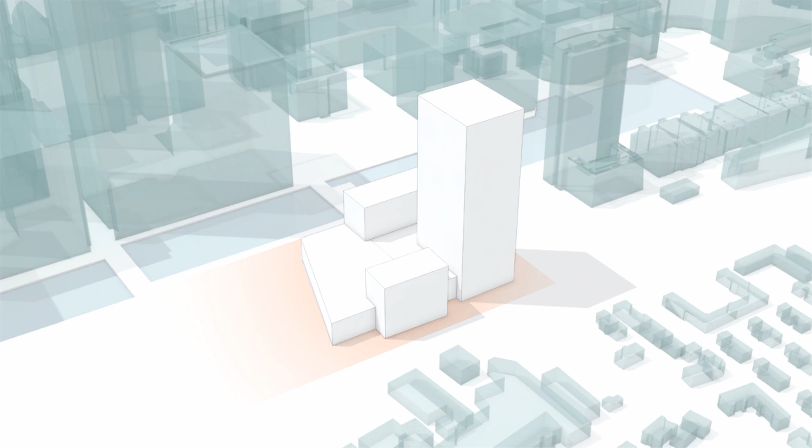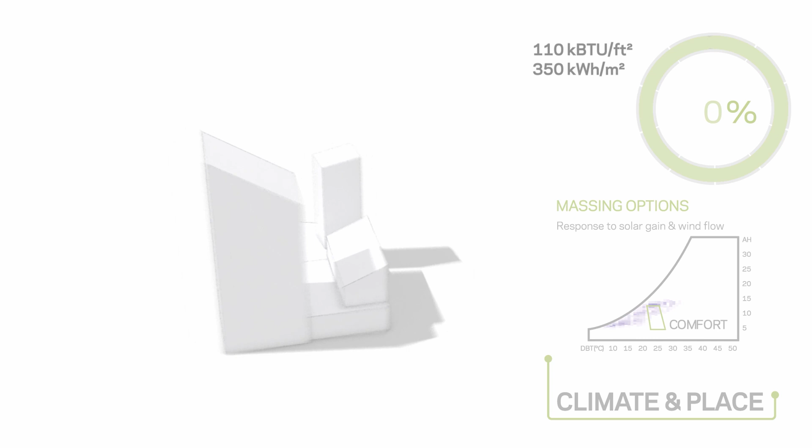At HOK, we utilize an evidence-based design process that begins across all of our projects. It's really focused in on trying to understand, with the context of our clients' goals around net zero energy, water, and waste, how do we explore the climate? How do we look at the diverse circumstances by which we can organize ourselves around biome, weather patterns, and other cultural conditions of a space?

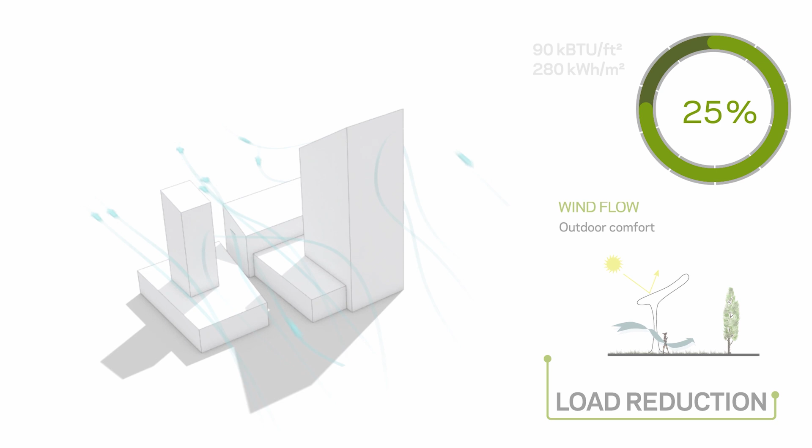How do we ensure solar access at the ground level and enable a passive solar design across a building envelope? How do we begin to look at natural ventilation and use parametric models and computational tools to optimize our building envelopes to integrate those natural systems into the built environment? By doing that, we reduce the overall loads of the building.

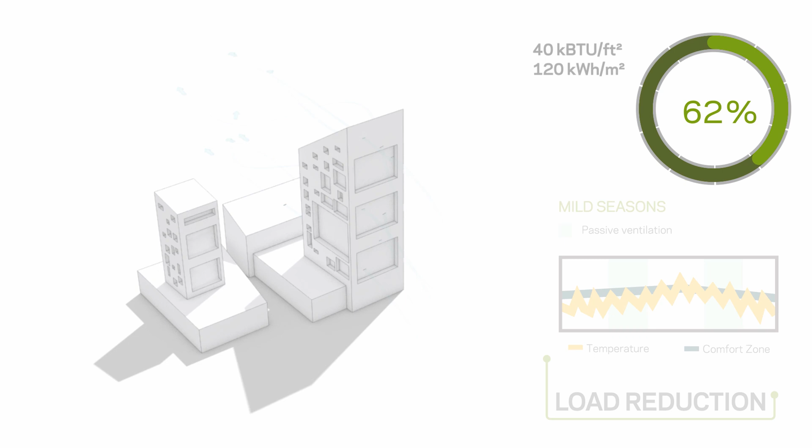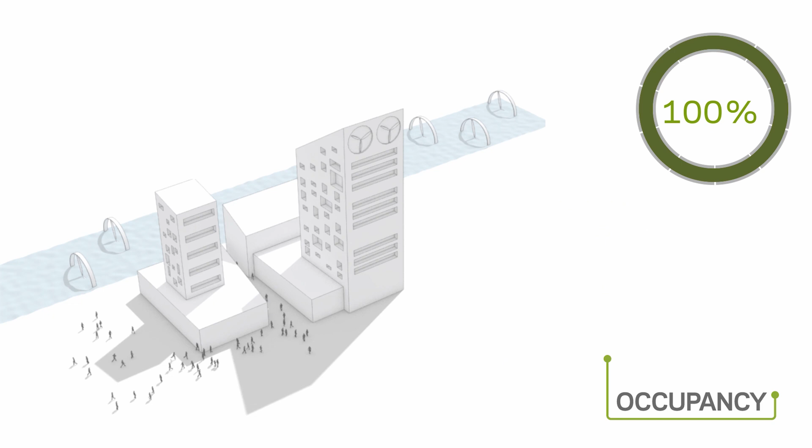A more important feature that we need to talk about now more than ever: what's the health and well-being of people, as well as the environment within that context? The last visual rises very quickly here, as we begin to see a building all of a sudden bloom with life on it. And it's not an easy piece of this puzzle. What does it mean to bring ecology back to the urban environment? That's what we're going to talk about over the course of the next hour.

We've been studying this at HOK for about a decade, trying to understand how we could leverage existing federal office buildings owned by the General Services Administration, partnering with Metropolis Magazine to explore how we can not only achieve net zero energy, but funnel water, utilize carbon emissions within the built environment and outside of it, and sequester it within building forms. This process is really meant to feature what we call net positive impact.

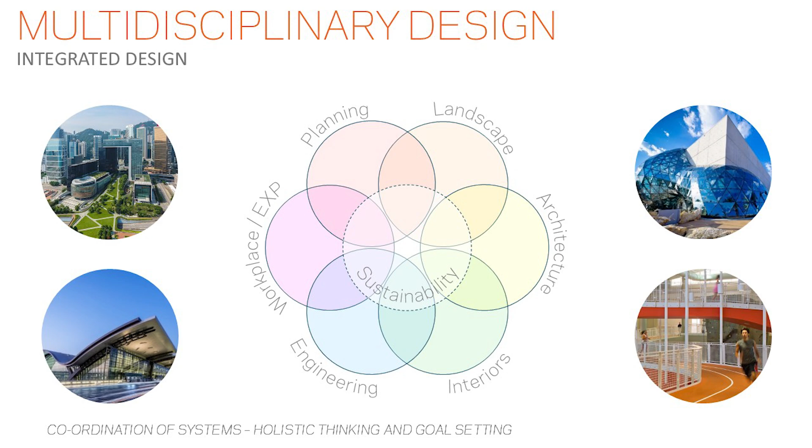Whether we're designing Tamar Park in Hong Kong, a wonderful open green space that allows the community to collect, or sports arenas, we leverage our individual expertise. As any problem that might emerge in design or even in the automotive industry or others, we have to ask questions of other experts to reach a better answer.

And it's that coordination point that we begin to term as multidisciplinary or integrated design. We look at the Atlanta Falcons Stadium and the Oculus that opens up, bringing daylight down to help grow the grass and also provide a dramatic daylight experience. We need to seek expertise beyond that which we hold ourselves.

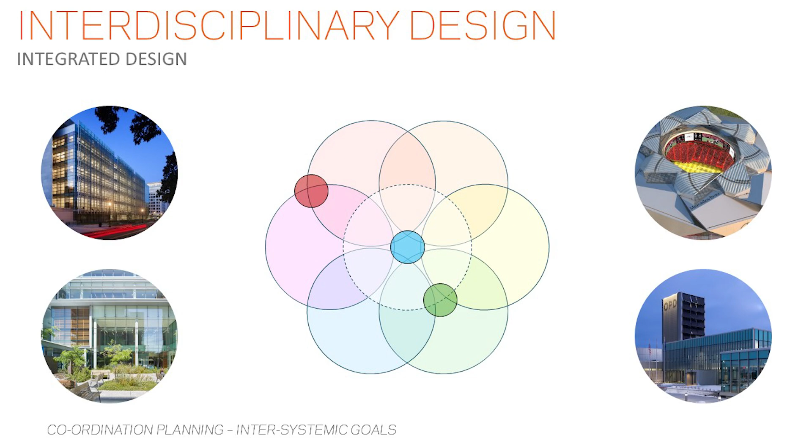At times, we develop relationships with those partners, and we start forming our own cultural community within design. It's at that point when we reorient ourselves to the expertise that exists around us that we begin to completely take on a bit more of a communal understanding and focused growth. We call this interdisciplinary design.

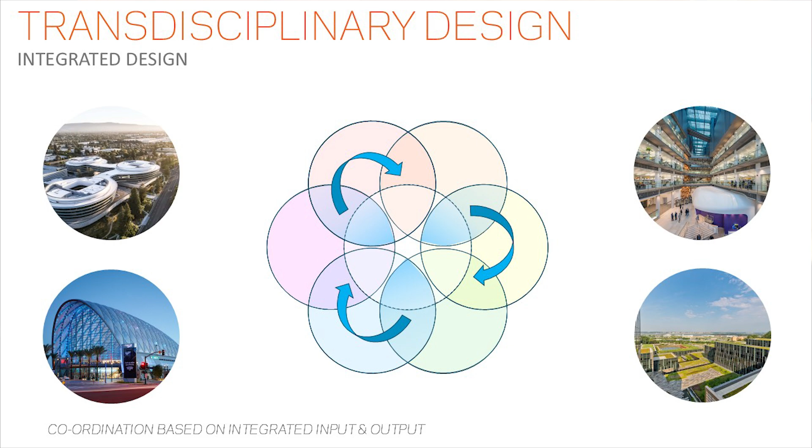The results from this, exhibited at Apple's Central & Wolfe campus or ARTIC in Anaheim, a future high-speed rail station, begin to demonstrate solutions that if you took apart any piece of it, you would lose a part of the whole. What would that curvilinear office complex meant to evoke the landscape look like if you took away those curves? If you took away the lamella form of that railway station that reduces the embodied carbon of its structure by up to 80%, you're left with another square box building. And so we need to leverage our partnerships to better understand how we solve problems.

There's another expert that we should be looking at more frequently, and that's nature itself. How do we rely on 3.8 billion years of evolution and nature's genius to serve as a mentor for the work that we do? And then when we do that, we begin to create mutualistic prioritization of the core, the environmental systems, with the whole.

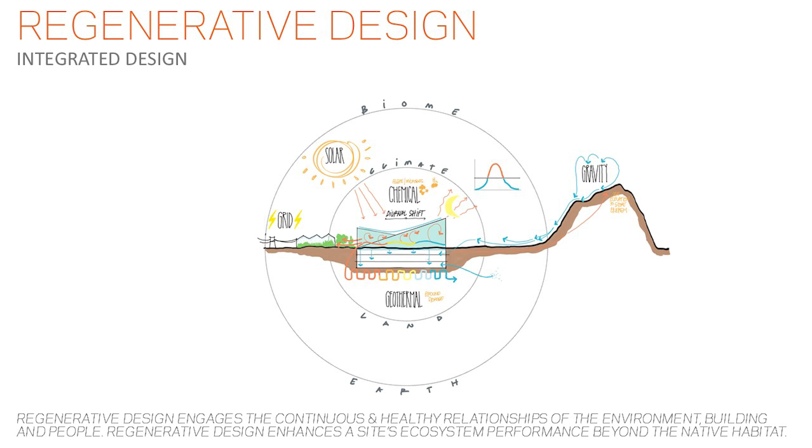We can all gather ourselves around a very common goal of environmental stewardship. Regenerative design engages the continuous and healthy relationships of the environment, building, and people. It enhances a site's ecosystem performance beyond that of the native habitat. Put very simply, regenerative design brings new life to something that has been depleted. It takes every decision and action and focuses it squarely on what would be best for nature. It puts life at the center.

Over the course of the next 45 minutes or so, we're going to talk around three recurring topics. I want to get you all engaged around a common challenge that we face within urban spheres: issues of resilience. We're going to talk a little bit about biological systems and how they may serve to be a good guide to it. And we're going to talk about design processes—how do we solve those challenges as a company, as a community, or as other more informal organizing entities?

The first challenge I'll present is that we face today, more often than any other point in human history, more than 1 million people moving into cities every week. That's the equivalent of building Hong Kong seven times over every single year. And so imagine the resource depletion we face against natural systems as we grow this urban entity.

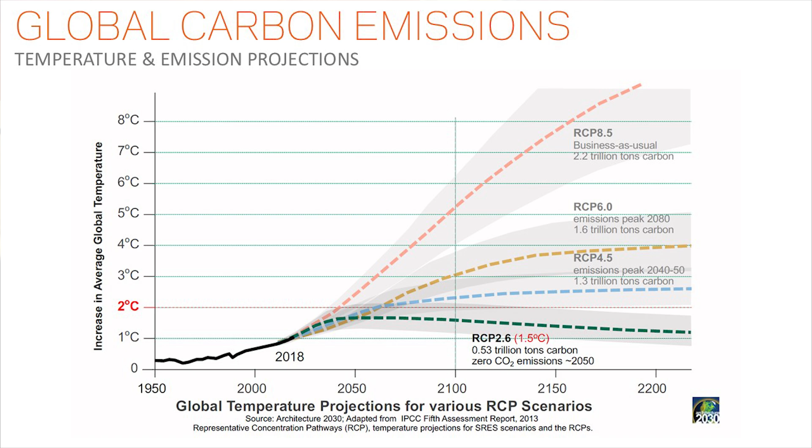Many of you involved here in the climate and sustainability track have no doubt seen some version of this graph—look at the IPCC reportings on our general trends towards CO2 emissions. If we follow a business-as-usual track, we reach 2 degrees Celsius and beyond, and impact a point of unsustainable climate change. If we can amend our behaviors, if we can build in smarter, better ways, we can bring down that curve.

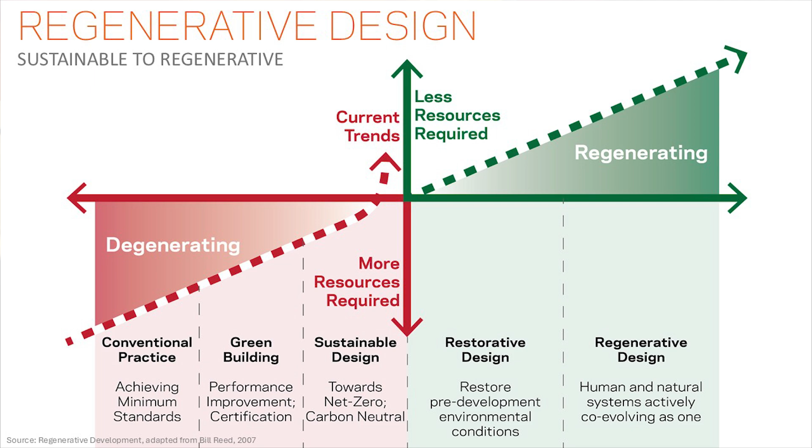A lot's happened over the course of the past several years, and we can be very excited about drawing that down. But what we want to do is go beyond a current target and focus goal of decarbonization or carbon neutrality, a goal of zero, to something that is hopefully more aspirational. And so sustainability becomes a somewhat inadequate term for the work that we're trying to accomplish.

If you all that have traveled here to Austin were to go home or go back to your business, and your supervisor asked you, 'What did you learn this week?' and you said 'nothing,' you'd get in trouble. If you went to your quarterly board meeting and asked, 'What were our profits for this year?' and you said 'zero,' you'd probably be fired. We need to move beyond achieving zero benefits for the environment.

Regenerative design looks to move ourselves from a standpoint of purely performing sustainable activities, a point of view of conservation, which we still want to maintain, but to go beyond that, to engage natural systems to replace artificial ones that we might not need, or that ecosystem services might perform better. At the point in which we begin to have those human and natural systems actively co-evolving as one, that's where we find parity between the artificial environment and the natural environment, and we're designing for nature and communities to join into each other equally.

This is an important challenge we have to face because biodiversity is beginning to become depleted around the world, and in order for us to achieve these goals, that becomes a really critical piece. The pharmaceuticals we rely on for our own health, the more systemic storms and climate change events we see, are all being exacerbated because nature isn't able to balance itself. And so biomimicry becomes another interesting piece of this.

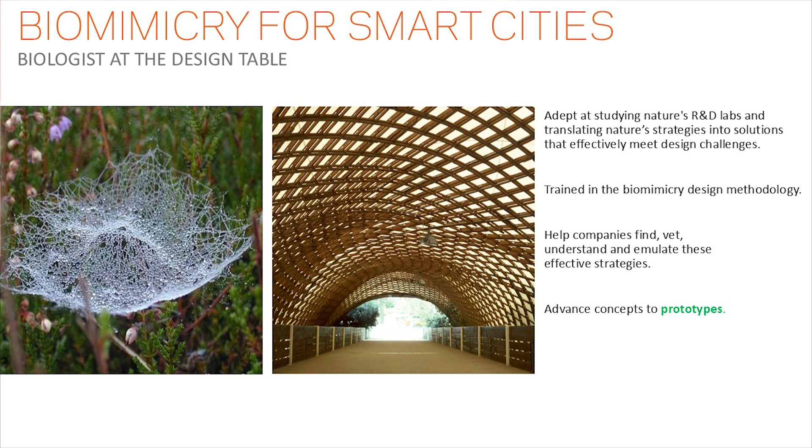Moving into number two, we're going to focus on how biology and natural systems can become this inspiration for us. The goal in biomimicry isn't to simply copy the forms we find in nature, it's to innovate using nature's principles. That means designing with the systems found in nature, those that have evolved out of 3.8 billion years of evolution on Earth. So that means studying nature's own R&D labs, understanding the ecological processes that exist, and how those can be utilized in both industrial applications, in building, but also very directly in the natural environments that we continue to inhabit and that provide us safe haven.

We want to find more companies and partners to vet, understand, and emulate those effective strategies, and formulate those as prototypes that we can begin to advance forward.

We're moving beyond a position of intent to one of evidence-based design in this process. We have for a long time been trying to create additional open space, nature within our cities. We know intuitively that these provide us benefits. But we're now able to, through the assistance of ecologists who have worked for 25 years at Ecometric Solutions Group, as well as artificial intelligence, begin to track the health and life of those natural systems to quantify how nature may evolve. So the third piece I mentioned is going to be about design and talking about solutions.

Our first solution really is a design process—no individual organization can solve all of these problems on their own. Our main partner in this is Biomimicry 3.8, a group that specializes in this biological strategy. HOK is partnered with B3.8 as well as Jacobs to begin to leverage all of the genius skill sets that we have to start working towards common challenges that we find in a group of change agents.

Those include companies like Ford, Google, Microsoft, amongst others, that are making commitments not only to environmental stewardship, but to environmental restoration. In this learning process, we work with them to create adaptive laboratories within the environment that allow nature to thrive. And so our positive performance methodology is a fairly simple one.

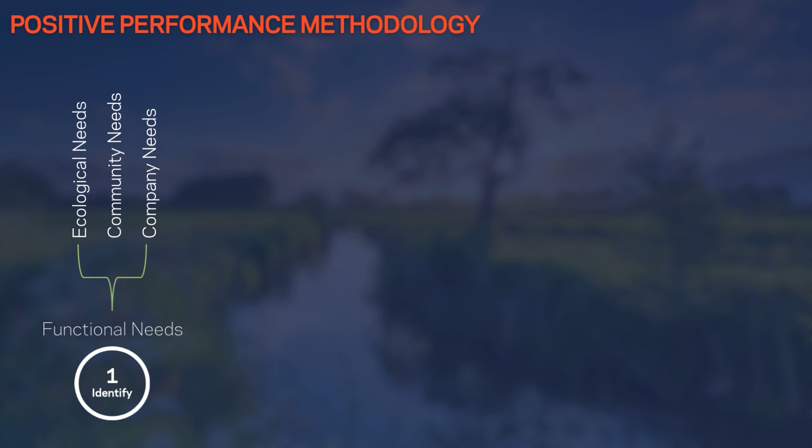So to express that in a little more detail, that positive performance methodology begins really by identifying the functional needs that exist between the ecosystem, a client, and a community that need to be served. We look at that ecological performance gap by quantifying it—what does the local site do against that reference healthy habitat?

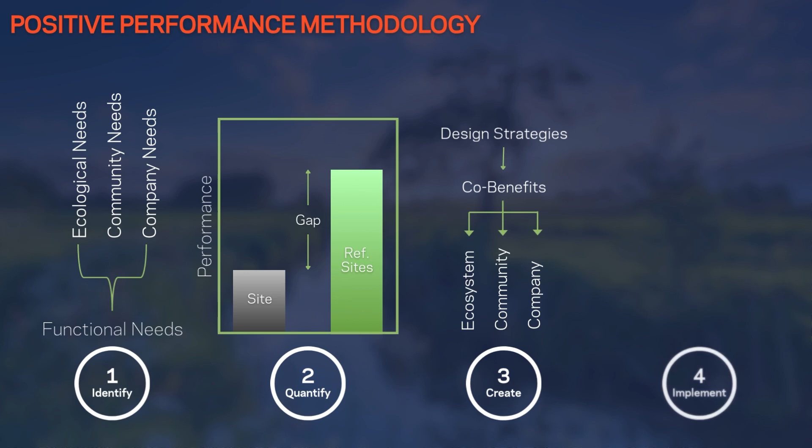We create design strategies to close the gap, identify those co-benefits that meet the mutualistic needs of the ecosystem, community, and company. And we work with management to understand how we can operate that long term.

We'll begin now to take you on a bit of a world tour of a number of different resiliency challenges that are commonly experienced, taking you through North America, Asia, Africa, the Middle East, and back to North America to explore the challenges we face and how we've relied on biology to solve them, and how we're beginning to identify and track what's being performed with them.

So we'll start off with hurricanes and flooding. Around 250,000 people have died over the past 25 years due to flooding, and more than 2.5 billion people have been impacted. Annually, on average, we see about $500 billion of investment impacted by floods.

Beginning in Washington, D.C. at the U.S. Coast Guard headquarters, a 1.2 million square foot office building completed around 2015, we were charged with exploring how to manage stormwater impacts across a 450-acre site, most of which is upstream or uphill from us and totally impervious. How can we manage not only the rainwater that fell on our site, but also what was rolling down towards us?

When we begin to look at biology, we can find keystone species that solve these challenges, and the beaver is a phenomenal one for this. Beavers slow down, filter, store, and distribute water. By looking at the collection of dams they distribute, you begin to understand a purification process that can happen. We can do this by looking at soils and the terracing of buildings.

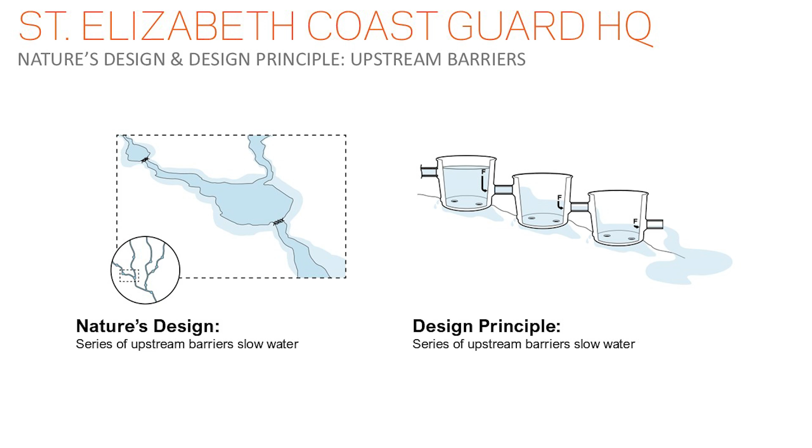So how can we translate nature's design and genius, this very simple series of upstream barriers to slow water, into a design principle that echoes that similarly? It's not as simple as creating a bunch of cascading roofs; you'd have a lot of water runoff.

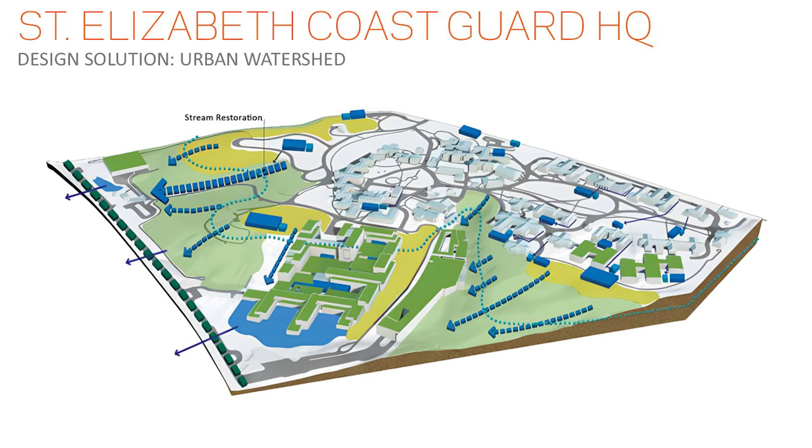Our watershed is pretty significant. We wanted to design a campus that would function as well as the forest to the north and south of us. Our main campus, the 1.2 million square foot U.S. Coast Guard headquarters building, receives water from upstream as well as from above. Creating that terracing landscape allowed us to look at the total quantity of water we would need to manage on site.

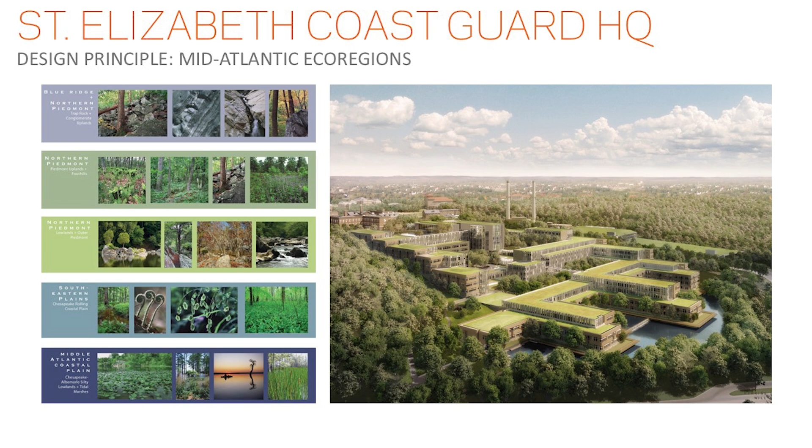We began to look not only at the context of the beaver, but the context in which we lived, across 5 different ecoregions, from the Piedmont Mountains to the Rocky Piedmont Plains, out to the southeastern coast and the mid-Atlantic coastside. By exploring these different landscape species, we began to understand different soil contexts and species we could propagate across the site, and developed a vision for the project.

How could we utilize it to service as this stair-stepping process? The resultant nearly 500,000 square foot green roof is one of the largest in North America. It manages approximately 500,000 gallons of water each year.

More unique than the beauty we see here is how the ecology around the site has responded. One of the unique maintenance challenges is that we have deer migrating across our site. A bald eagle's nest has formed on the administrative building as you enter the site, and the camera features that commonly. We've replanted trees, and the ambient temperature of the zone is much lower than the rest of Washington, D.C.

Each of the 5 different ecozones we looked at as inspiration for soils became different courtyards cascading down through this. What that creates for our frontline workers is a really calming environment for people with very stressful jobs. They get to look down on these terraces, looking out towards the Anacostia River, and experience that beauty.

Within the interior environment, you can begin to see, even from the child care center, the connections that every different office environment has back out to nature, inviting you into these different courtyards with distinct representative characteristics.

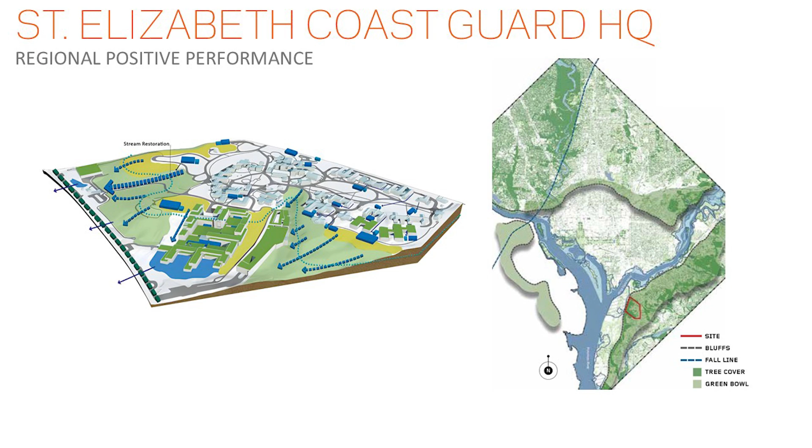Well, this is one campus. Imagine if we began to manage all of the stormwater that collected on our site and worked to actually funnel that and better the communities around us.

From the mid-Atlantic US, where we have water abundance, to Dubai and the UAE, where we deal with water scarcity, I'll take you now to Al Barari, a residential hospitality development about 10 minutes outside the center of Dubai. It's here that Al-Barari, best known for its landscape company Greenworks, has created one of the first sustainable hospitality developments in the region.

What we deal with in Dubai is what you might expect: temperatures above and beyond 40 degrees Celsius every day of the year, high rises and impervious hardscapes, making the ambient temperature feel like 50 or 60 degrees Celsius.

On the site here at Al-Barari, we took inspiration from Al Ain Oasis, a regional oasis that teaches us lessons about how to store water underground and properly recycle and reuse it. Being the site of a landscape company, it was already an oasis, but as it's being converted into a residential development, we're seeing a lot more water use. So the question became: how can we redistribute that water and create a more habitable condition, re-exploring urban living in Dubai?

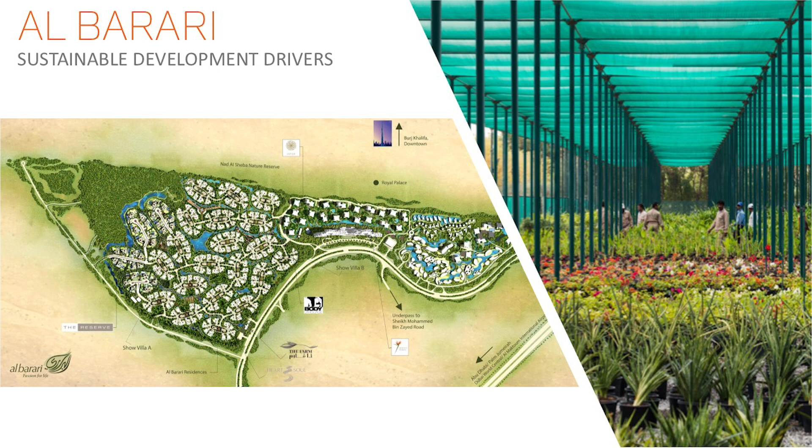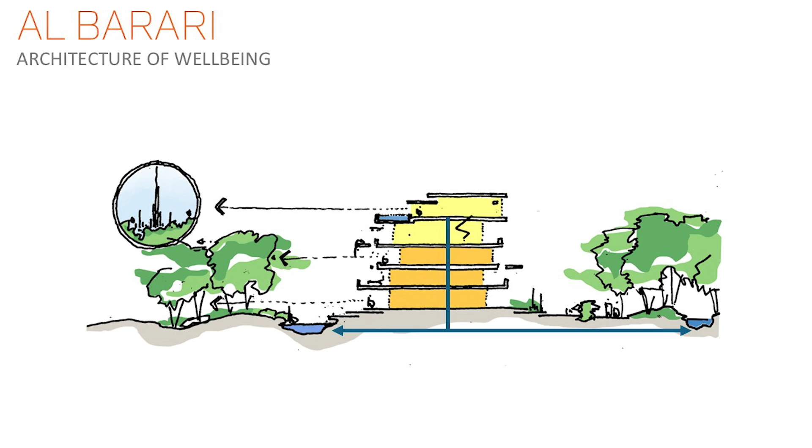The Greenworks company had, for the longest time, followed fairly sustainable practices for its landscape nurseries. But as we began to look at converting that into mid-rise residential living, we wanted to take all of the water being used by the buildings and feed it back into the ground, allowing it to propagate through verdant landscape waterways to really bring the landscape to life in the area.

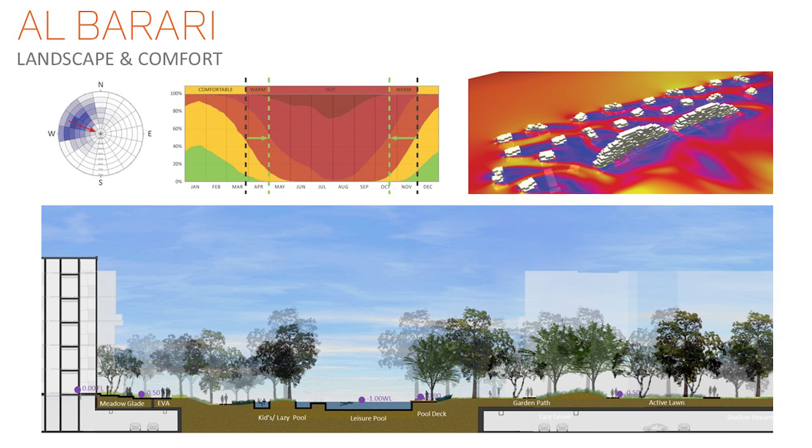Beyond that, in our master planning process, we looked at natural ventilation and pathway flows, reorientation of the building so we can create a porous landscape that allows these natural breezes to create a calming and comfortable attribute.

The ultimate effect shown here at Asjar is a development that is typically 2 to 5 degrees Celsius cooler than we find in downtown Dubai, about 6 to 9 degrees Fahrenheit. So on that typical 40 degrees Celsius day, we're down to around 34 degrees Celsius.

A strictly pedestrian-only environment where people are allowed to walk through the spaces in a child-friendly way, exploring and learning about the landscape systems. Water is reused about 3 or 4 times before it is funneled back down into the groundwater, using both artificial water reclamation on site and processing, as well as feeding through landscape systems multiple times.

The environment allows for a diurnal exchange that enables cooling at night, releasing heat into the night sky. For the residential living, the architecture itself utilizes a series of cascading terraces and shades that reduce the amount of active cooling that needs to occur on the site. The resultant effect is mostly a beautiful, harmonic environment.

Moving from Dubai onwards to Singapore, the Singaporean government around the mid-2010s began focusing on how they could create the highest quality healthcare for a broader public base. So when we began to work on the first such hospital, the first public hospital in Singapore, we looked at the dipterocarp forest.

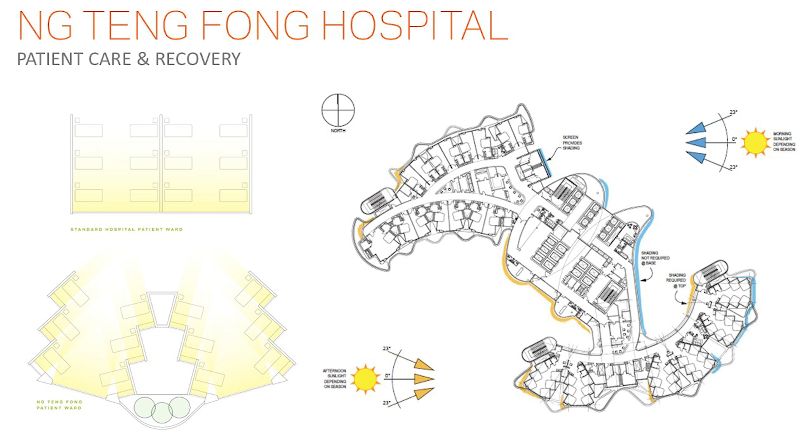The most simple move occurred in our medical planning. How do you move from a typical 6-dorm bed unit, which features very little natural light, almost no views, and definitely no natural ventilation, and splay it out to enable all those access ways, branching it out across the site to allow diverse exposures and breeze flows, so you could bring in natural air without the risk of cross-contamination?

The resultant bed units provide every individual both privacy and communal engagement, with their own personal window to view out towards the cascading gardens that follow through. All of the rainwater that falls onto this building feeds into a number of different gardens dedicated to patients, practitioners, and families.

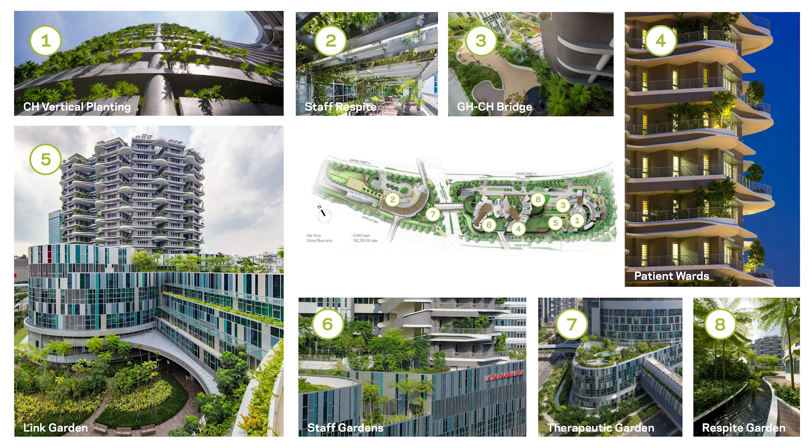Most notably, we find that these gardens not only service those people coming to the hospital and general needs, they also allow the public a pedestrian environment to avoid walking on the sidewalk, where they'd be exposed to more noxious emissions from the neighboring street. So we elevate the plane of the hospital to create a new type of communal environment, one focused not only on the active measures of dealing with health, but also preventative or even proactive ones. How do you provide the best environment that reinforces social engagement and betterment of one's own health and quality?

Many of the examples I've illustrated thus far are developments where we see people of means, companies, campuses, building things out. How do we make that practical for all?

In collaboration with BuildX Studio, based out of Kenya, we began working on the Sachibondo Healthcare Center in rural Zambia. It's here that we found ourselves working in a community in which it took typically more than a day and more than 100 kilometers of travel for anyone to be able to access healthcare.

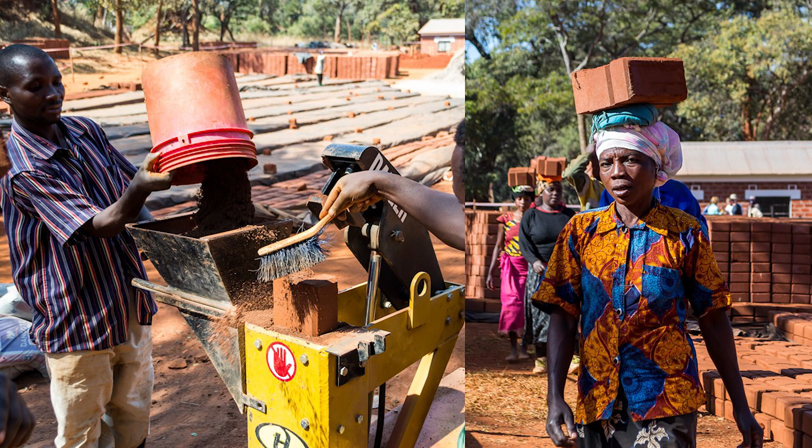The primary focus on the site was a combination of infectious diseases such as tuberculosis, as well as maternity and pediatric care. So the notion of trying to keep these different groups and department flows both separate but commingled became intentional. We also needed to work in a siloed environment. So how do we design for equity and circularity in that place?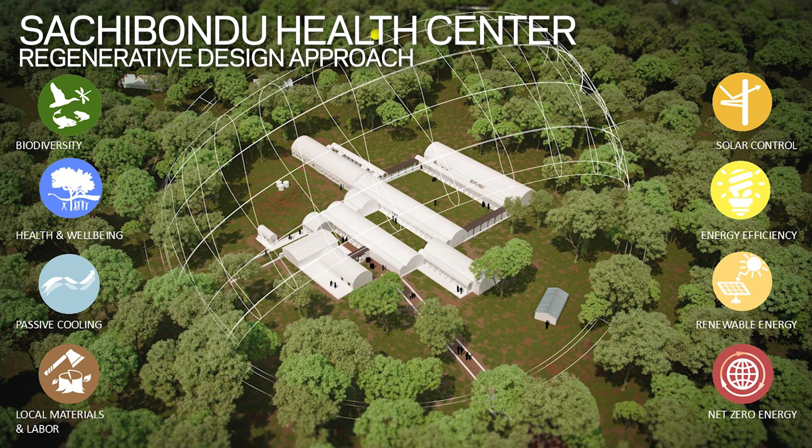Our regenerative design process identifies the unique ecological characteristics of a site. We began working with BuildX Studio to identify the appropriate means to incorporate medical planning that would avoid cross-contamination and enable a site that allowed people access to the outside, appropriate functioning of the healthcare system, and an increase in total bed suites for people coming to the site for either form of care.

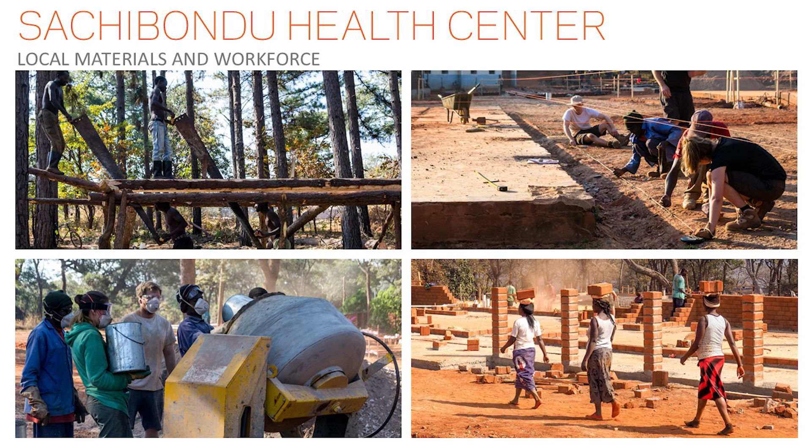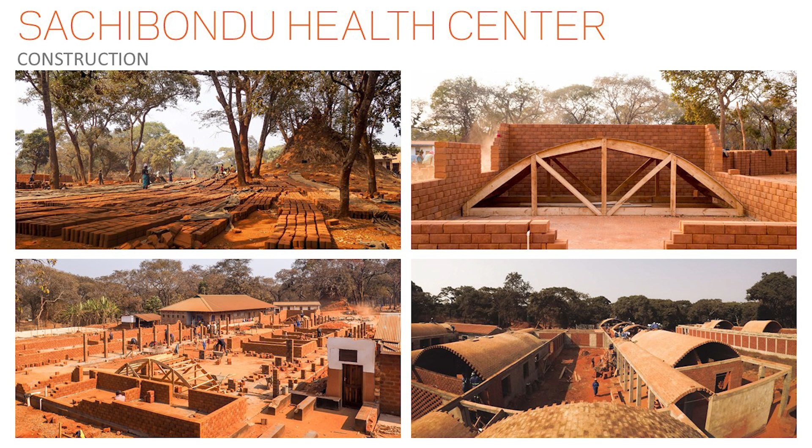Most notably, about 80% of the materials here were sourced on site, and because we were about 12 hours distance from the nearest builder, we utilized the community for the labor force. The predominant construction materials are rammed earth brick, dried out in the sun, and locally harvested wood. More than half of the labor force was women, all paid at an appropriate market rate. The resulting construction process taught them new skill sets being introduced into the area.

So we took what we'd learned over time on larger scale projects and brought it here, enabling the community to own that process themselves. The resultant healthcare center has been in operation now for about 7 years, and enables the healthcare of the region to thrive in a space that was much more challenging to find before.

We'll conclude our journey, still along the healthcare track, in Palo Alto, California, where Stanford's medical campus has expanded over the course of the past several decades. The hospital has become challenging to unite practitioners, academics, and administrators as the built environment of the School of Medicine has begun to really expand.

We were given a charge to find not only a space where people could congregate as one, but how we could create an environment where an individual left better than when they arrived. For here, we were lucky enough to be located adjacent to Stanford's Arboretum.

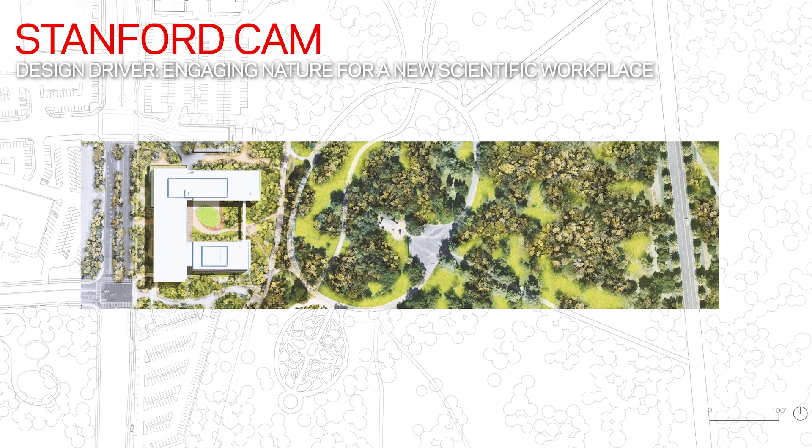Taking over an existing parking lot, we looked to rehab it and restore the natural environment. But rather than simply placing the building adjacent to the Arboretum, the question was how do we actually bring nature into the campus itself? How do we lift the building off the ground and create a new scientific workplace through engagement with nature?

The coastal live oak is what we find most commonly in the Arboretum here, and it teaches us a number of key lessons about ecosystem engineering. Coastal oaks are microhabitats; their root structure pulls in water from afar. Its canopy extends as far out as its roots do, enabling an evapotranspiration effect that creates conditions appropriate for a diversity of different species.

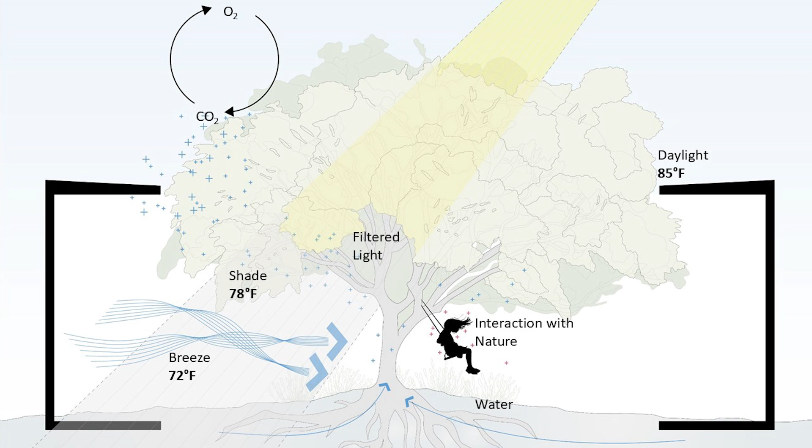By looking at patterns of light, promotion of breeze, and funneling of water, we began to ask ourselves: could we engineer the exterior environment to be as comfortable outdoors as indoors? Rather than blurring the boundaries between indoors and outdoors, could we break them open completely? Rather than building a less embodied carbon building through materiality, how do we build a smaller building? So 20% of the building's program is built outdoors.

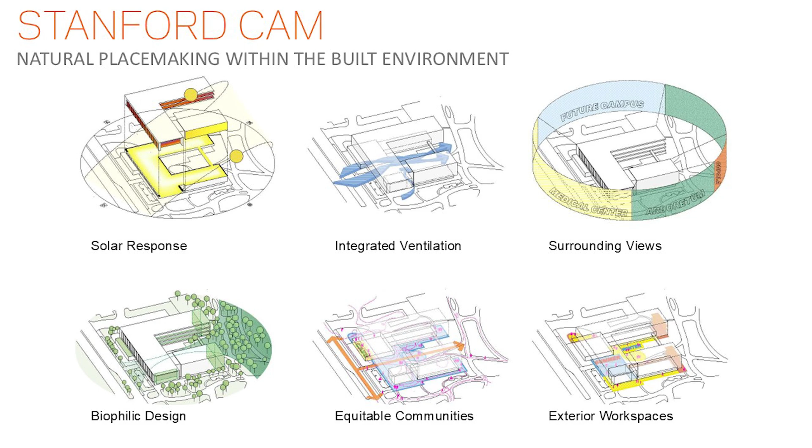And so before we begin optimizing our structures, we've eliminated 20% of our carbon. We follow through that natural placemaking effect, incorporating passive solar design, natural ventilation, connection to nature, but also enabling the community to come through, which is a difficult thing for any academic campus. There is a perceived wall of separation.

And so with the parking lot previously, it wasn't known that you could really move into the Arboretum. Now the building serves as a phenomenal gateway to allow that equitable access of local residents into it.

For those people that work inside the building, long hours or coming in after an 8-hour surgery at all hours of night, we created the same reference materials, patterns, and textures that we found in the Arboretum into the building itself. And began to terrace through the building, began trying to create the experience of the Arboretum ground, the understory, canopy, as well as views out to the sky.

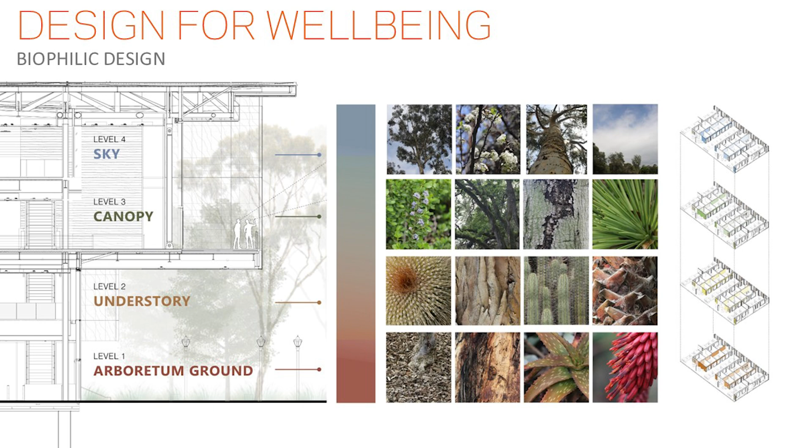As I noted at the beginning of this, ecometric intelligence has become a really important piece of our puzzle. How do we begin to not only intend to improve environmental quality, but how do we measure ourselves and keep us true to it? And so by looking at what we find and quantifying nature's benefits, we can see a native habitat.

When we carve a road through that ecological node, we don't reduce it by one-third. We sometimes reduce it by two-thirds because we've disconnected the most important pieces of a natural flow.

Our building begins to move towards it, but it doesn't quite fulfill the whole picture. There's still work to be done.

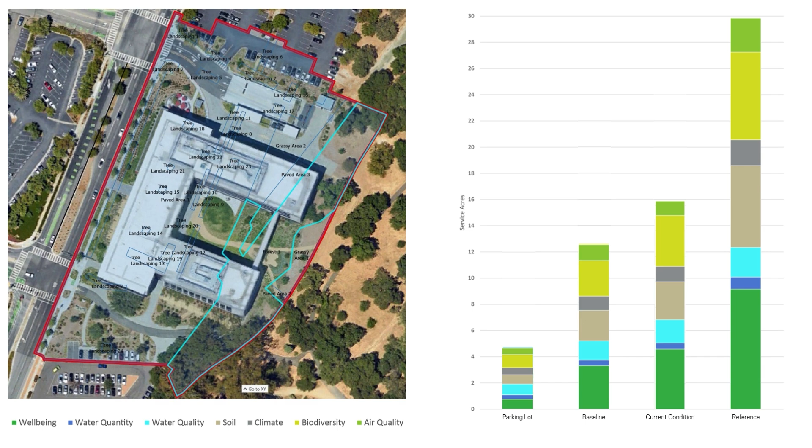If we were to engage a green roof in there, incorporate more natural systems in the process, you begin to see that gap close. And that's the journey that we're going to be on for the next 25 years together. Not exploring carbon neutral buildings, but net positive buildings, net positive developments and benefits towards the overall community.

And so as you come to Stanford along Quarry Road, you see that gateway. You have summer gardens that provide passive cooling and shade from the sun. During the wintertime, you're exposed to sun and shaded from the breeze.

And throughout spring and fall, public or private academics are able to engage in many of the balconies that lay across the arboretum. And as the arboretum begins to move into the campus, we start seeing the ecological connections begin to reform that had been lost before.

Beyond what I've been able to show you through the work that we've done exploring development within the built environment, there are issues beyond. Those that exist within agriculture that continue to deplete resources through following a fairly simple crop-based cycle. We want to explore more of those same regenerative system flows that we see occurring within agroecology.

To begin to look at permaculture, to create better uses that incorporate and enhance soil health, water flows, air quality, biodiversity, human health and well-being, as well as carbon sequestration.

And that's where it becomes really important for us to get out of our silos, for us to ask questions that go beyond what we're expected to understand or what we're tasked or trained to know, to rely on each other in a very new and dynamic way.